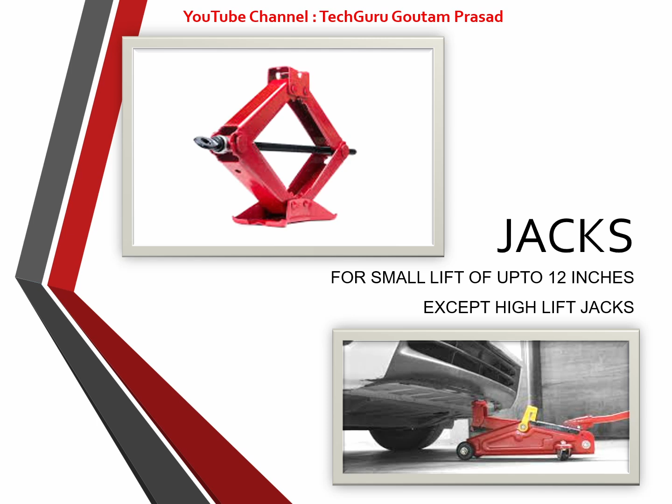But in exceptional cases, high lift jacks are also available in the market that are capable of lifting the object or the equipment more than 12 inches. So let's proceed. Here different types of jacks have been shown. This has been numbered for your convenience to count.

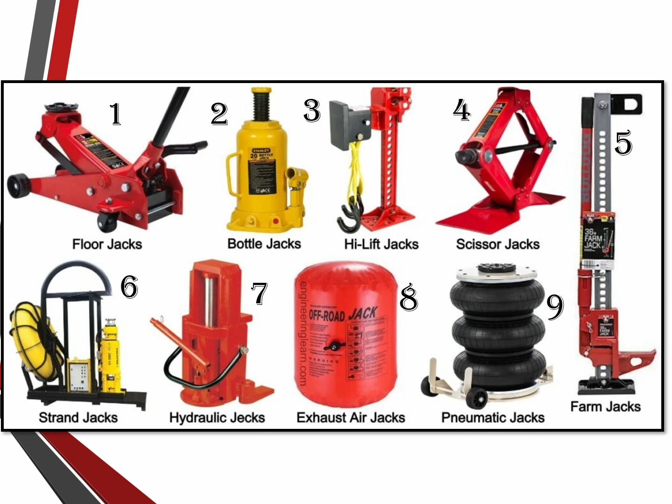Let's explore the important types of jacks. We will not discuss all the types of jack, but most of them will be discussed here. So this is a floor jack that is kept on the floor, and it is also used for lifting cars for changing their wheels or tires as part of the maintenance activity.

Here, this is a type of jack that is called a mechanical jack, and they do not require any kind of additional arrangement like fluid, etc., or power for their operation. They are operated manually. So basically, these mechanical jacks are screw type jacks because they are threaded. They have the threaded mechanism that makes them operable.

They are also used for heavy lifting or light lifting, but in most cases of heavy lifting, hydraulic jacks are preferable because with less power they can lift the heavy object easily. The most common form of the hydraulic jack is also a car jack, floor jack, or garage jack, which lifts the vehicle so that maintenance can be performed.

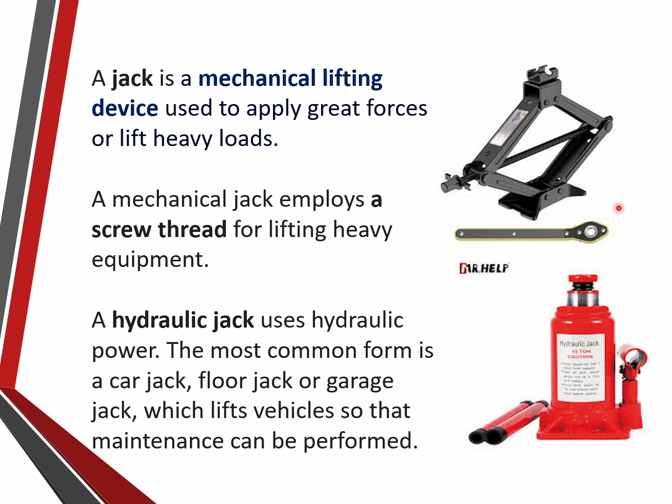Mechanical jacks have been shown here, and different types of mechanical jacks have been shown in different sizes and shapes. Mechanical jacks are often found in automotive industries for lifting automobiles and other heavy loads. Unlike hydraulic jacks, a mechanical jack uses physical means such as a motor or hand-operated lever to lift and lower the object. They automatically lock in position even when the power is disconnected.

Mechanical jacks could be motor operated, but in most cases they are manually operated and can only be moved again when power is reapplied. So wherever you leave it, it will lock to that position. That is the beauty of this.

In contrast to this, hydraulic jacks are not self-locking, and that is a drawback of hydraulic jacks. Now arrangements have been made so that hydraulic jacks can also be made self-locking by providing some mechanical means.

So when participants come to our lab, we show them how these hydraulic jacks are made self-locking by providing some mechanical means. The safety feature makes mechanical jacks an attractive choice for many industrial applications. They come in different capacities.

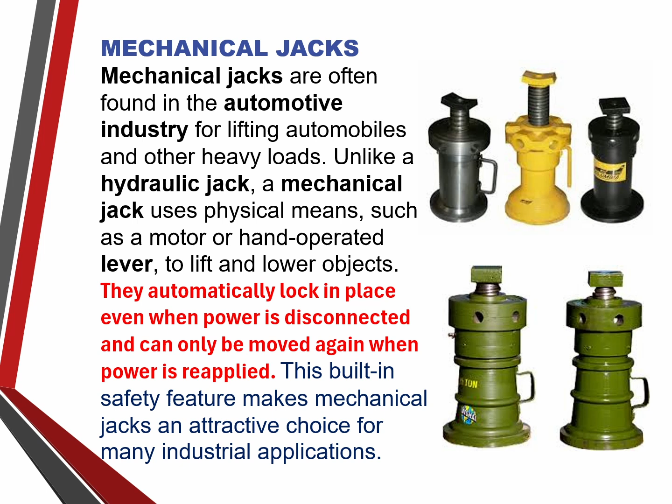Here, one such mechanical jack has been shown, and this is a platform on which the object will be kept, and a handle will be inserted in this hole and rotated. These mechanical jacks are capable of raising heavy equipment and other loads ranging from 1.5 ton to 3 ton. The mechanical jack's lift capacity rating informs the operator whether it can be used as needed.

So here are three common types of mechanical jacks and how each is used. The screw jack is the first jack. Screw jacks utilize a screw mechanism to raise or lower the load. The screw is rotated clockwise or counterclockwise, and the screw threads or the screw pitch hold the load in place. Other kinds of mechanical jacks feature a screw that turns in place while a nut moves up or down.

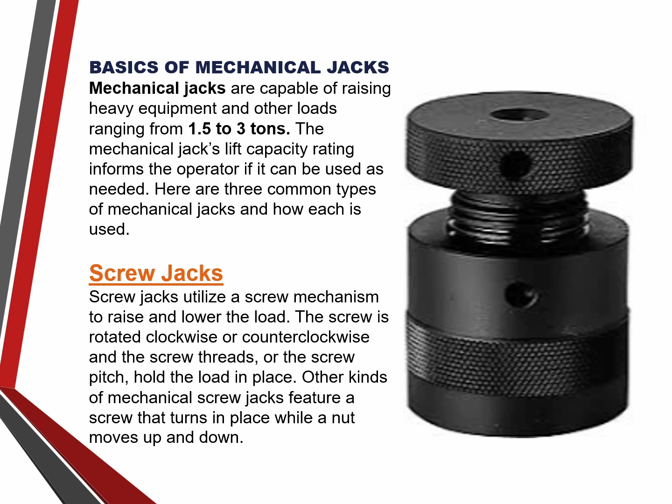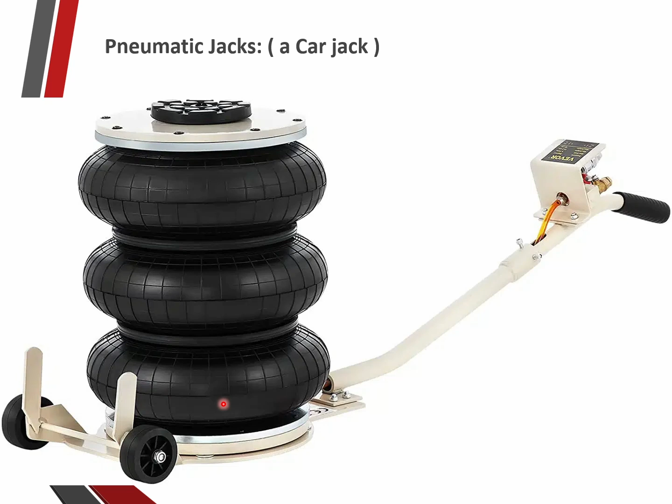Here there is a pneumatic jack, and air pressure is applied to lift the object. You can see some rubber tire-like structures piled on each other. When air pressure is applied in these tire-like objects, it starts lifting the object in the upward direction, and that is how this pneumatic jack works. There is some electrical arrangement also shown here, which is used for pumping air into these tire-like things.

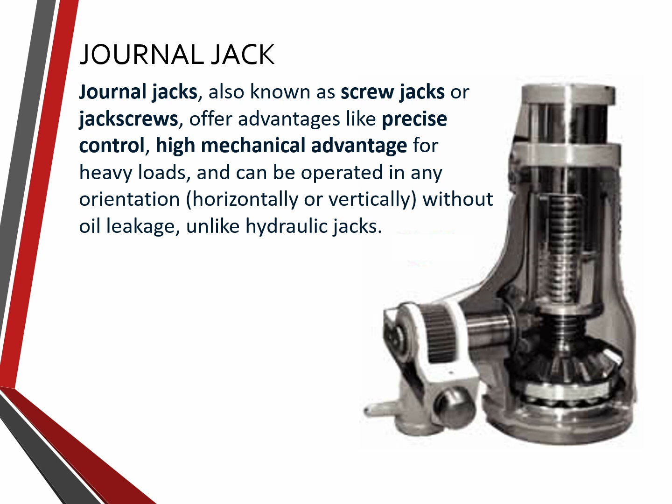The main advantage of having this journal jack is that it gives you a high amount of speed reduction, and this utilizes a certain kind of bevel gear that features a high amount of speed reduction.

So journal jack has got many advantages. Some of them are here: precise control and alignment, high mechanical advantage, no oil leakage, reliability as well as durability, wide range of applications, and compact and lightweight. It could be either manual or motorized.

Safety features are high in this type of jacks. Some journal jacks include safety features to prevent overextension and ensure safe operation of the jack. This is also cost effective, not so costly because it's a mechanical jack.

House jacks are prevalent nowadays, and these are also used for heavy duty work. Screw jacks are used for raising or stabilizing the building or heavy beams in construction applications, such as relocation or repairs of the building.

Wood cribbing supports the structure until they successfully lift the load to its desired level. Wooden support is given to temporarily lift, and the jacks are then applied. Once the construction or structure is lifted up to the desired position, wooden blocks are kept to handle the load, and the jacks are removed from their position.

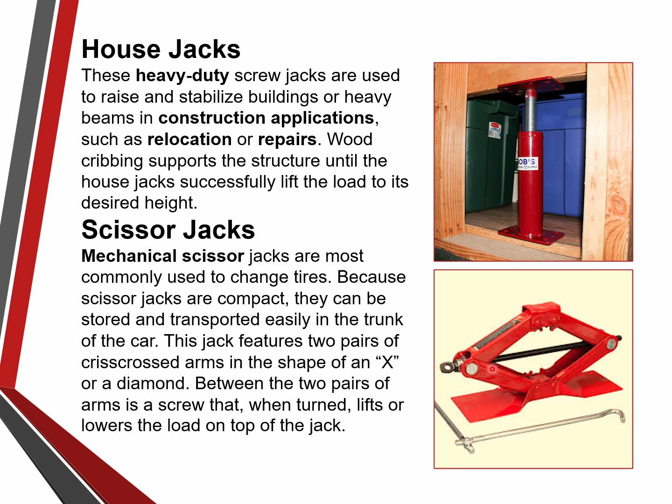This is the scissor jack that I have already discussed, so I'm not going to discuss it again. Proceeding to applications of the mechanical jack, these are used in applications ranging from changing stage designs to altering settings on woodworking machines to adjusting radio telescopes.

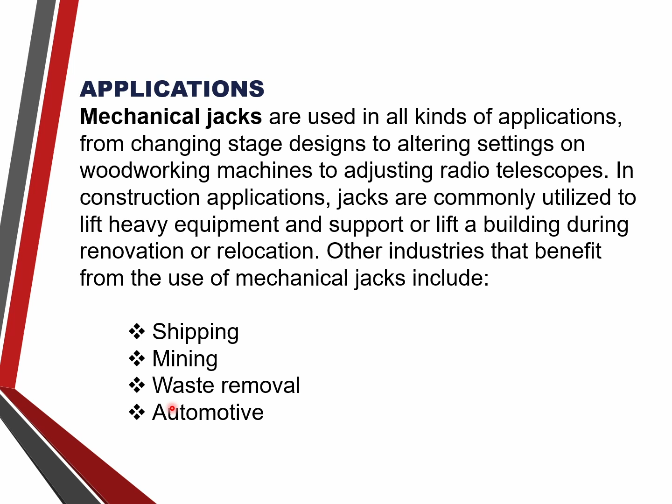In construction applications, jacks are commonly utilized for heavy equipment, support, or lifting a building during renovation or relocation processes. Other industries that benefit from the use of mechanical jacks are shipping industries, mining industries, waste removal agencies, and automotive industries.

Now, have a look at hydraulic jacks. A hydraulic jack is a mechanical device used to lift heavy objects by applying force to a small area. The force is applied through a fluid, not manually and not through air. It is usually some type of oil, and the fluid is contained in a cylinder.

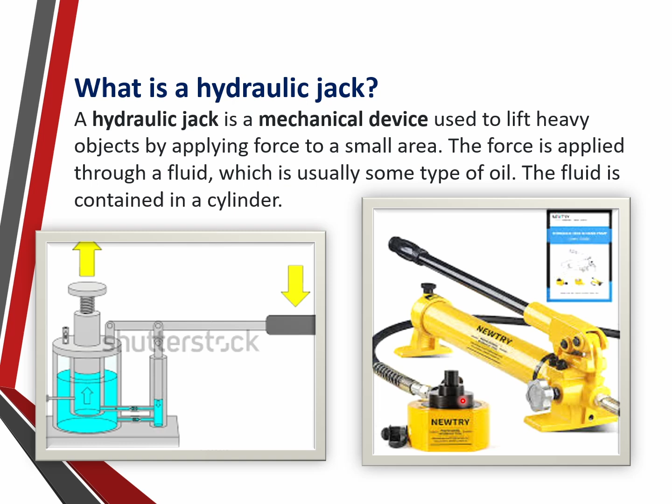So how does question arises, how do the hydraulic jacks work? Their function is based on the concept of Pascal's principle. This is very important to understand. Now, the question arises, what is the Pascal's principle?

This principle states that when pressure is applied to a fluid in a confined space, this pressure is transmitted evenly throughout the fluid container. In hydraulic jack, an incompressible fluid links two cylinders, a large cylinder and a small cylinder, so that when a given amount of pressure is applied to one cylinder, that same pressure is transferred to the second cylinder.

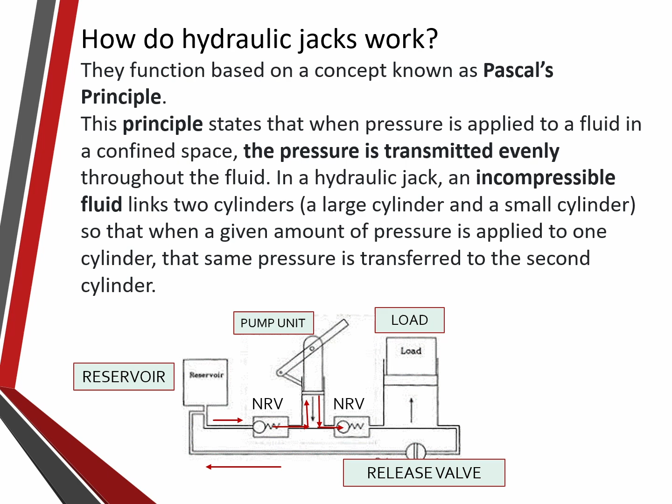So that is how this hydraulic jack functions or works. I hope this picture is properly understood to you, and this is very important from the point of view that if you understand this picture properly, this will lead you to understand the working of the hydraulic jack in a very proper manner.

Now let's come to another part. What are the differences between different types of hydraulic jacks? Hydraulic jacks come in many different shapes and sizes, each designed for a specific purpose. The most common type of hydraulic jack is the bottle jack, also toe jack, and there is trolley jack, and heavy equipment jack. So we will see them one by one.

Bottle jacks are usually found in your vehicle, used when you need to replace your flat tire, or you want to change out one of your fluids. These tools provide enough clearance to easily change the tyre and make adjustments.

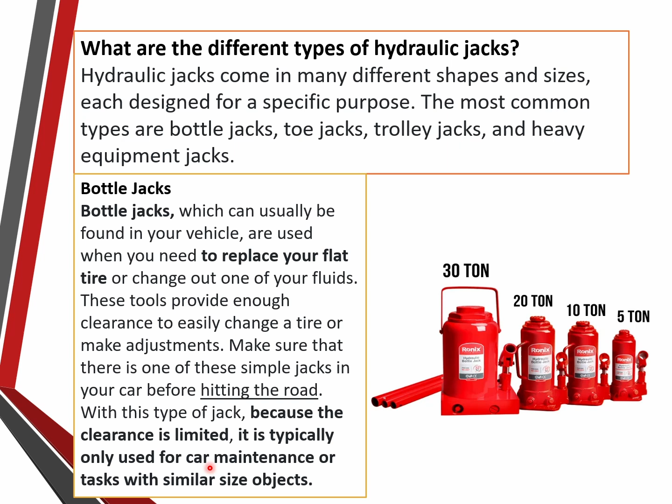Make sure that you keep one of these simple jacks in your car before hitting the road, because anytime a failure takes place, this will help you in changing your tire or the wheel. With this type of jack, because clearance is limited, it is typically used for car maintenance or tasks with similarly sized objects.

Toe jacks are often shaped like a typical bottle jack, except that instead of placing the cylinder under the car or object to be lifted, a 90 degree toe attached to the cylinder is placed under the object. So this toe is placed under the object.

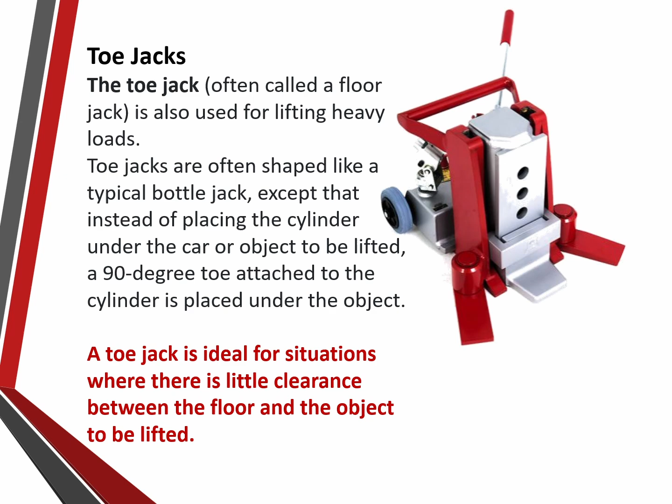A toe jack is ideal for situations where there is little clearance between the floor and the object to be lifted. So if there is little clearance between the floor and the object, the toe jack is the most suitable one.

Trolley jack. This is called trolley jack because it is portable in nature, as it is fitted on all four sides with wheels. So you can put it anywhere, you can move it anywhere.

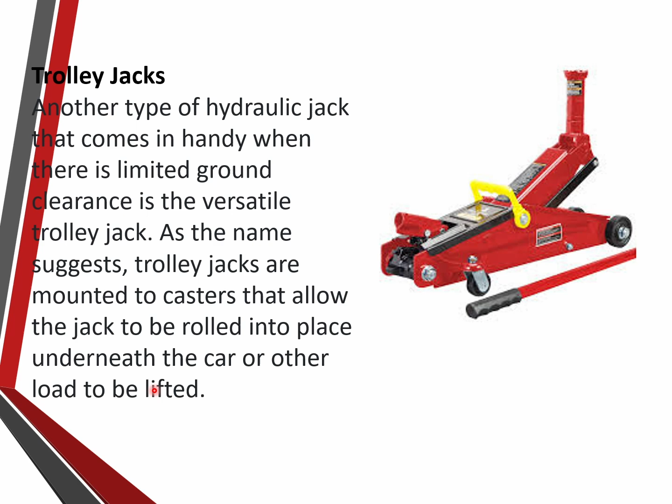So another type of the hydraulic jack is the trolley jack, that comes in handy where there is limited ground clearance. This is a versatile trolley jack, as the name suggests. The trolley jacks are mounted on casters, these wheels, and that allows the jack to be rolled into place underneath the car or the other load that is required to be lifted.

A simple bottle or toe jack, as mentioned previously, isn't going to work when you need to lift a heavy piece of equipment for servicing. These large and heavy pieces of equipment need loading capacities beyond the capacities of other small jacks.

And these jacks need to be solidly constructed, forged, and made from materials of the highest quality. Failing to do so could lead to danger to you as well as others working around the jack. So they have to be made from solid, high quality materials. Heavy equipment jacks, let's proceed.

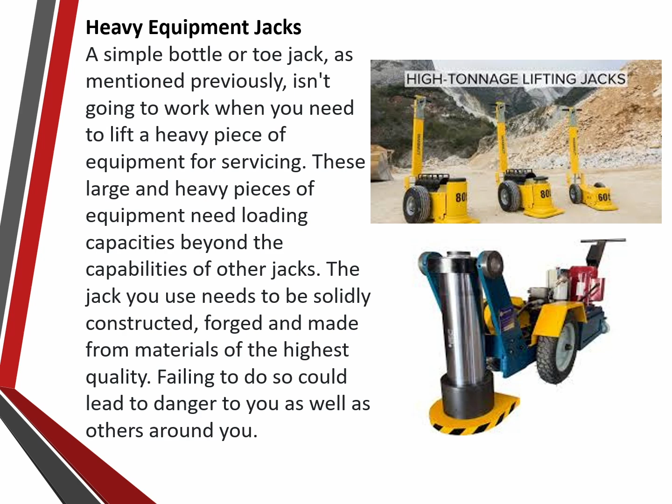So, where are hydraulic jacks used? Hydraulic jacks are used in a variety of industrial applications. For example, they are commonly used in automotive and construction industries. In the automotive industry, hydraulic jacks are used to lift vehicles so that mechanics can have access to the underside of the car.

The simplest of these is the bottle jack mentioned earlier, and that is likely to come with your car. In manufacturing and heavy industry, this is typically where you will find heavy equipment jacks used.

Sometimes they are used to facilitate repair of large machines, and other times they are an integral part of the machines. In construction, hydraulic jacks are used to lift heavy loads and materials. They can be used for purposes such as lifting a house so that its foundation can be repaired. A house is a bigger object, and that load can be handled with the hydraulic jack.

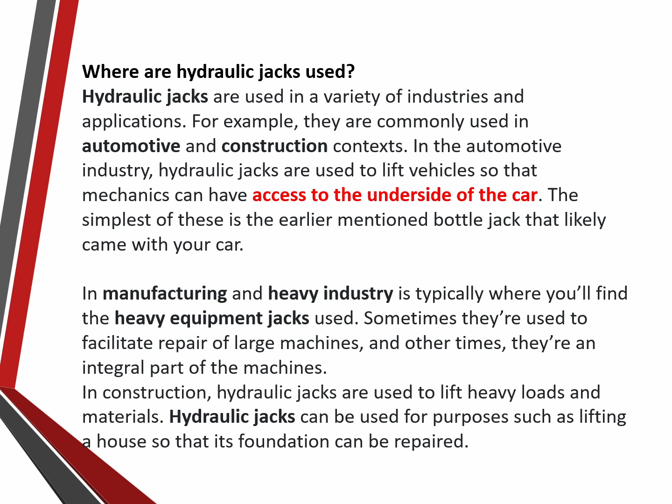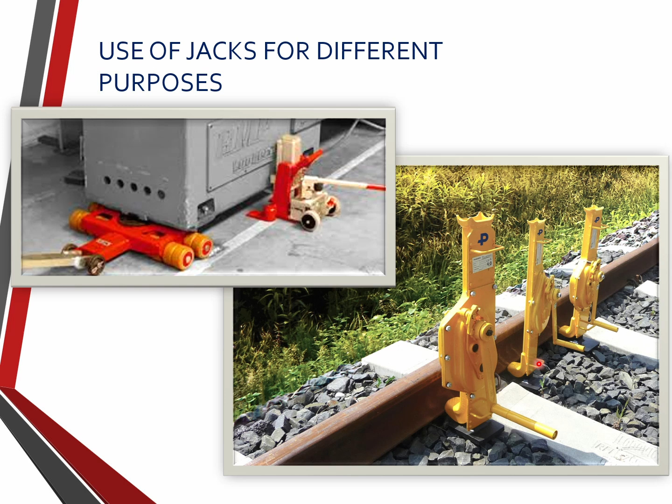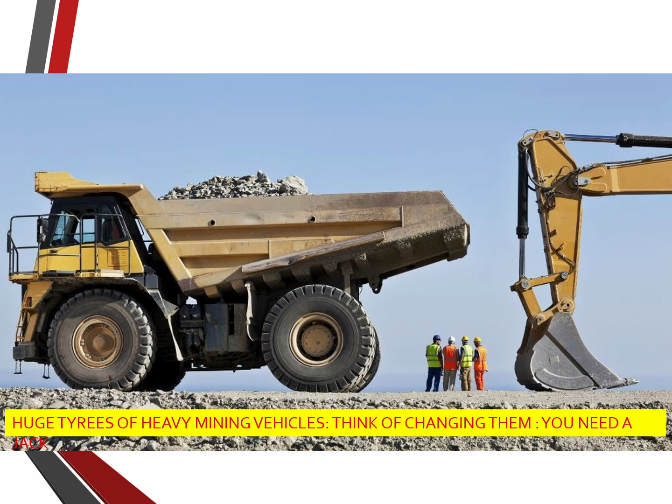So this is quite heavy, and in order to change them, we have this type of equipment, and they take out the tire. But before that, this vehicle is lifted and the tires are taken out. This equipment also helps in changing the tire, not only changing the tire, but unscrewing the nuts that tighten them. So it is quite easy with the help of this equipment. So jacks have been shown to you.

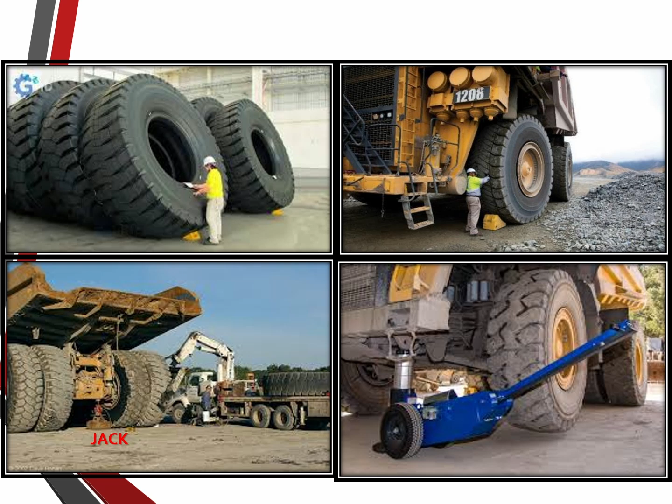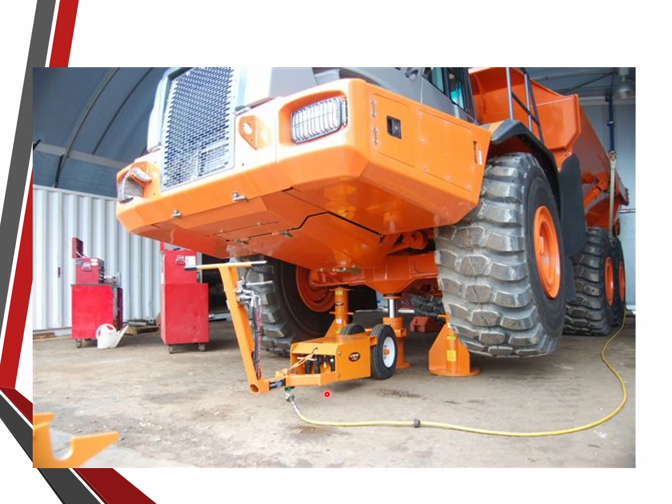Here is the jack, one jack you can see here, and here some person is standing just beside the tire. So you can think how huge the tire is. So here also some jack is being used to lift the vehicle, and this person is working on the tire, standing to let you feel how big it is, how huge it is. Here also some jack is there. This jack is just kept under the vehicle, and it is being used to lift it. One jack is here, another is here, and yet another is here. So three jacks are being employed to lift this vehicle for changing the tires or the wheels.

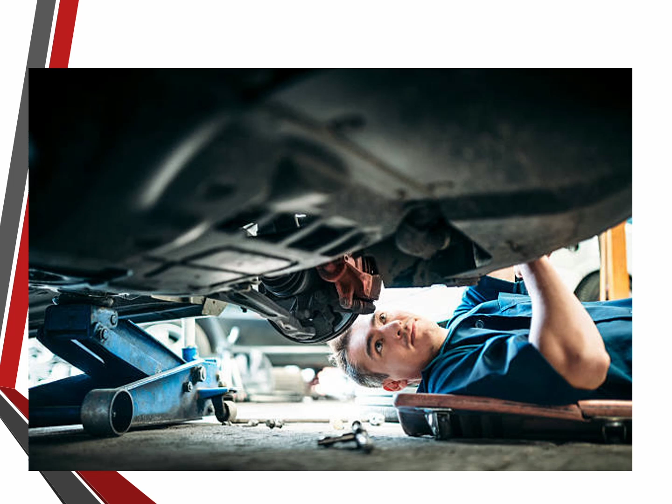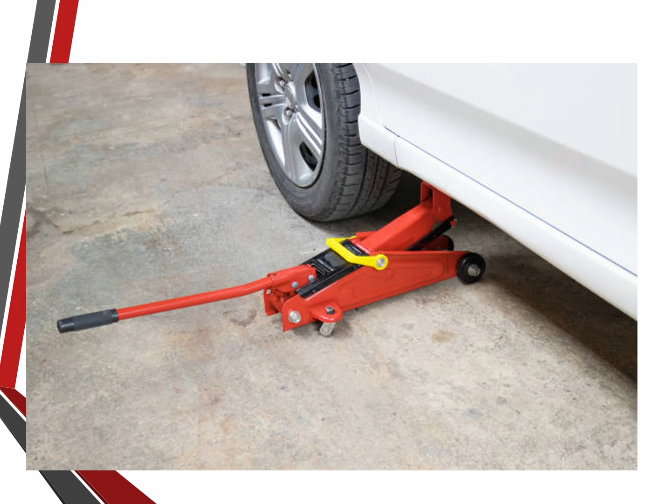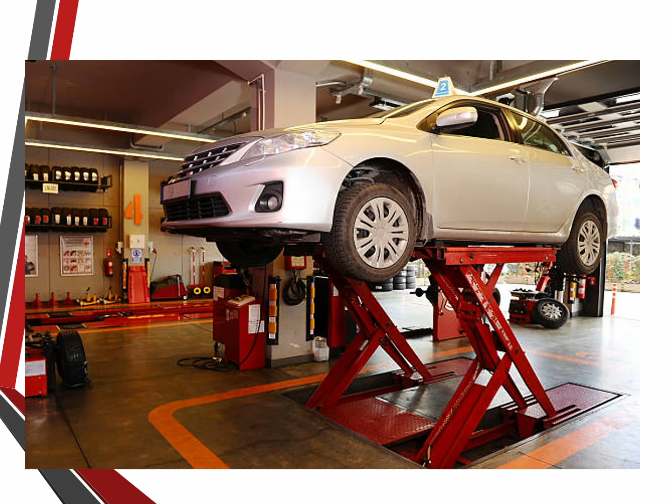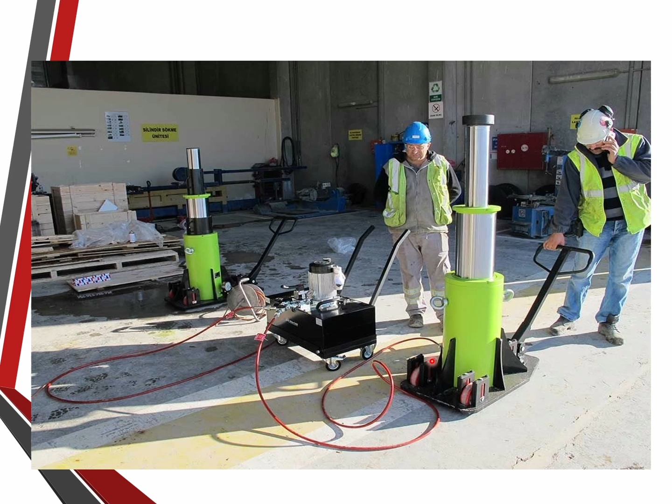Here also one jack is there. So this is a tow jack basically, and the person is working under the car doing some maintenance job. Here also a tow jack is there, and a car is being lifted on one side for changing the tire. Here also, this type of jacks are part of the car garage, where the maintenance work of the cars is done. So this is a big jack lifting more than 12 inches, as I told you in the beginning. Here also huge jacks have been shown, and these two gentlemen are working with this jack. This is the pump unit, and these are the jack units.